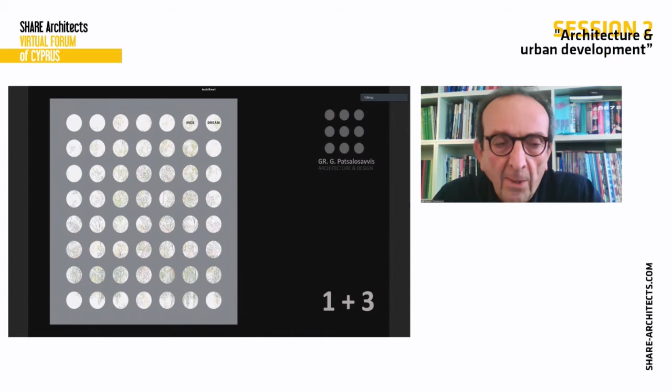I moved from London to Cyprus in 1996, and I've practiced since then in Nicosia. Today I would like to show a few things we work and design for the center of Nicosia, and our response to this newly formed urban environment.

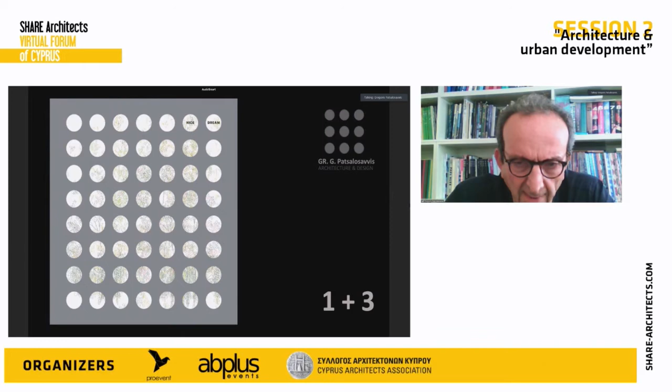The center of Nicosia, a few years ago, became a high density area. The planning law changed, and the current planning law allows for high-rise buildings and more density. The question is whether high-rise buildings are a necessity or a current trend, and how we respond to this.

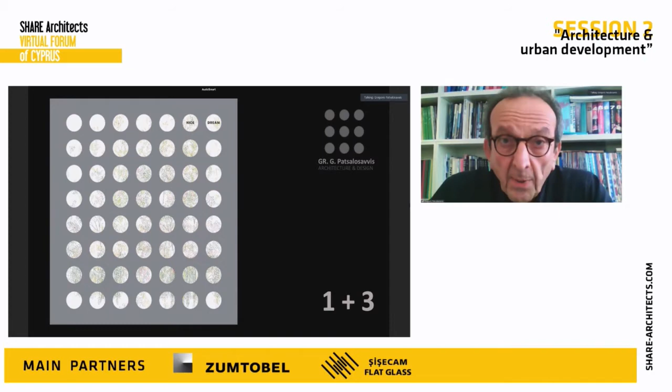Our response is that any high-rise building is built to create new city life, and make sure it will respond to the future development of the city. Our office is involved with residential projects, housing, multi-housing, commercial offices, hospitality, and public buildings.

May I quote something from Urban Future 21. It's been said that we live in the first urban century, where the majority of the world's population live in cities, and city dwellers will form part of a single global network.

This makes us think about what is our collective task for the development of the urban environment. We think we should aim for more sustainable cities. We're not talking about new cities, we're talking about transforming our cities into sustainable and livable cities.

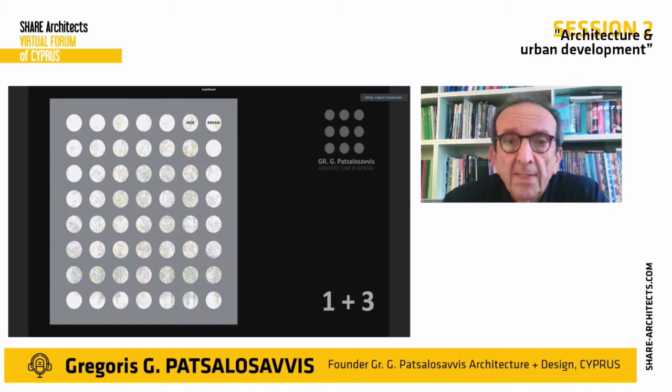The main principles of our office and design process are... sorry, I didn't change the slides before.

Going back to our main concerns in our design principles, since I started my own office, it has been environmental sustainability.

Our architectural design principles are based on response to the local environment, the quality of life, the improvement of quality of life, environmental issues, and the interaction of our architecture with the city.

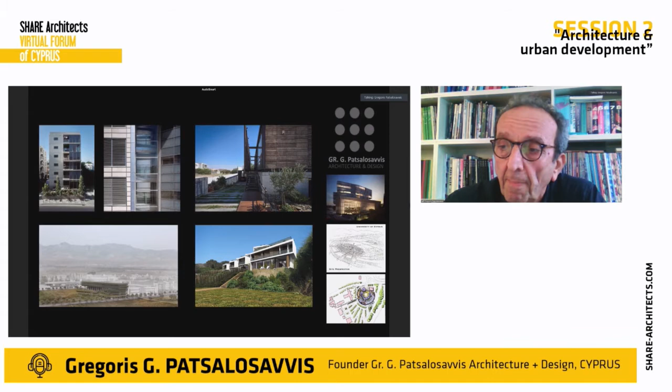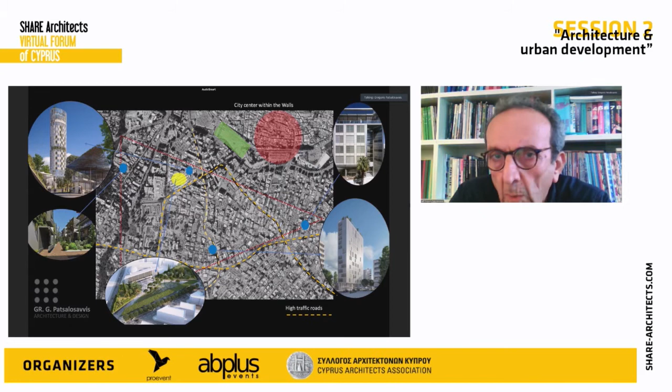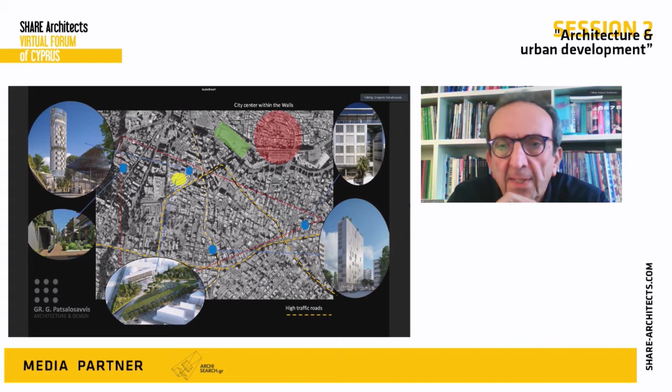The yellow spot is the new development of the old GSP Stadium of Nicosia. The blue dots are our office's interventions into this part of the city. In yellow, you can see the busiest roads going around this commercial dense area.

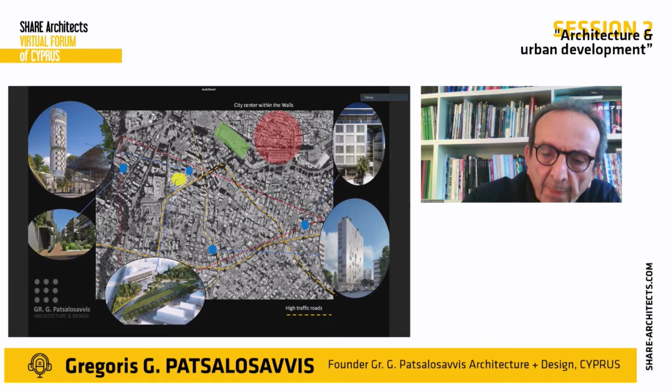The first project I will present is a joint venture with architects Yannis Kizis, Constantis Kizis, Efthymios Dougkas from Greece, and myself from Cyprus. It was a competition for the development of the old GSP Stadium, as we call it in Greek.

The program of the competition was a result of a referendum held by the municipality, where the people of Nicosia asked for a park and a square. So that was a challenge: to bridge these two public functions, a park and a square.

We all know the size of a football pitch and a stadium, and it is impossible to have a sizable park and a sizable central square.

Anyway, I think the competition was won by this project because our team managed to bridge these two demands of the people of Nicosia.

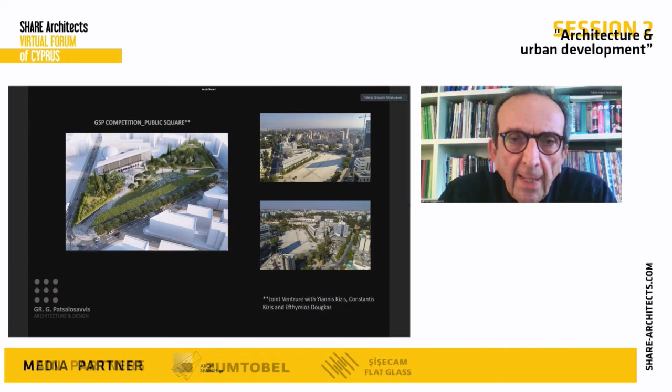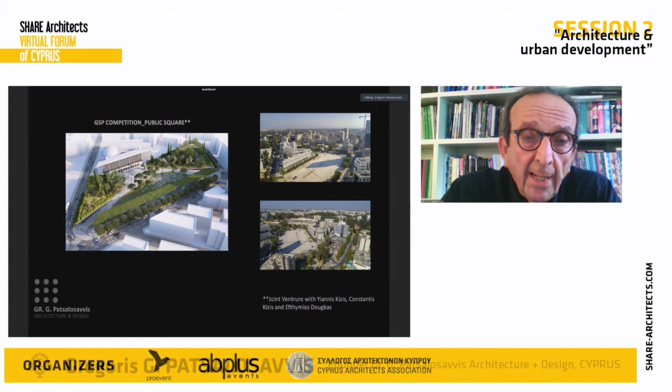It is the first public square in Nicosia, and it is already becoming a reference point in the development of the City in the Future project. It is on the way for construction, for the materialization of the project, and we expect it to finish in 2.5 years' time.

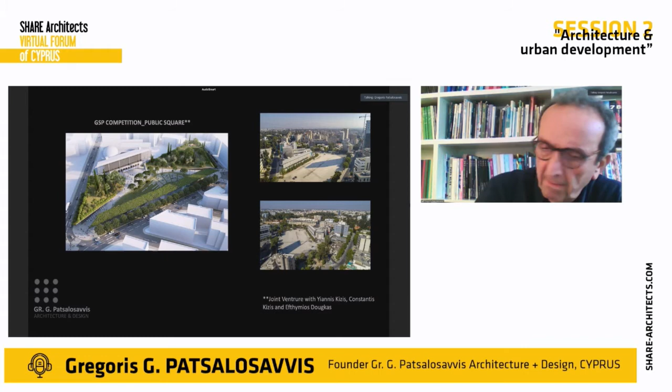The third project is the first building we built in this commercial area, the center of Nicosia. It's a building for one of the highly respected developers in Nicosia, Nice Day Development, started in 1996 and completed in 1999.

It's a building of shops and offices, and this was the first time we tried to face the issues of sustainability and environmental concerns. We introduced shading to all openings, controlling the sun and the natural light, filtering it while protecting from the intense summer heat.

It's been a long time since then, more than 20 years, and we always refer to this project because it was the first workshop for defining our design tools.

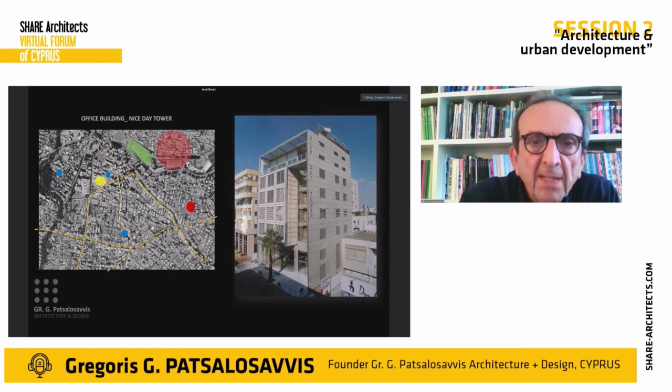The next project is near GSP. A few years after we won the competition for GSP, we were commissioned by a private client to design a mixed-use development building right at the northeast side, the east side corner of GSP.

This was a real challenge: how to respond to this new reality of GSP and create a landmark, while at the same time making a building that is sustainable and provides quality of life to its residents.

Initially, this was a mixed-use building with offices and residential units. At ground floor, receptions and common areas, 8 floors of offices, and then the top floors residential units, with common areas including a gym and cafe in the middle.

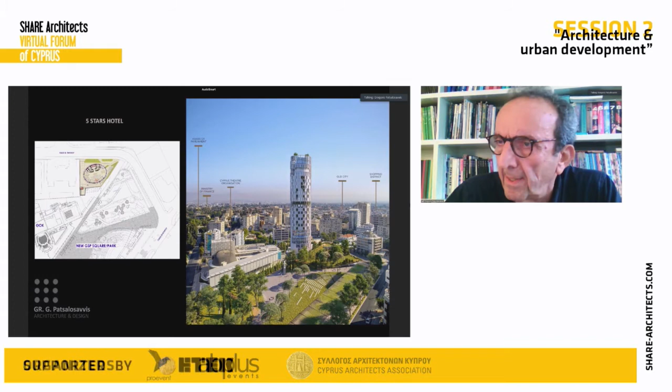Because of the economic crisis in 2013, the commission came in just before the big economic crisis in Cyprus, and everything slowed down until 2015.

In 2017, the client decided to change the program and make it a 5-star hotel, adding 8 more floors for a total of 28 floors. So it's a vertical hotel containing all the functions: receptions, conference areas, gym, restaurants, open-air swimming pools on top, and in the middle an administration area.

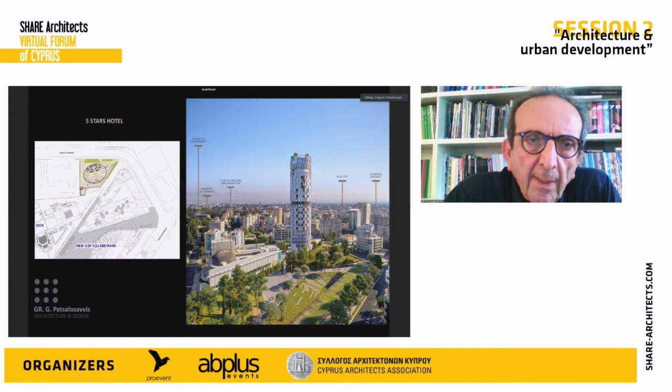The interesting thing about this building is that the shape derives from the site conditions. We wanted to respond to the competition brief, the new situation, and try to make the tower a landmark next to the first public square of Nicosia, oriented north-south.

All the habitable spaces have south orientation, with plenty of natural lighting, using and having the benefits of the sun when needed, and of course controlling the sun where we don't need it, filtering the lighting for the inside spaces. So the necessity of developing a system to do this environmental task forced us to design a double layer facade.

The external layer of the facade consists of a metal structure, metal panels, the majority perforated, and movable, made to move mechanically so they can control at each time of day the penetration of natural light and protection from the sun.

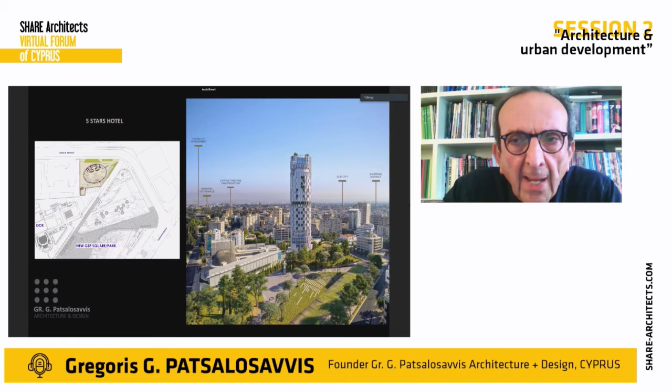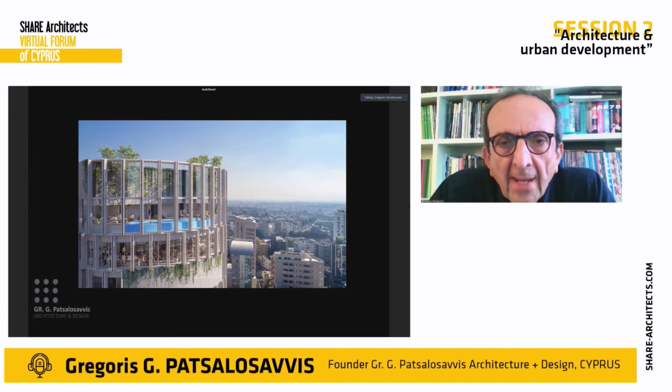We spent considerable time working out this system with local manufacturers, because importing these systems would be very expensive, and cost is crucial for a private investor. So we managed to develop a system, a folding system, which would serve our design goals.

The system is highly developed and competent at this stage, so we used it for our next project.

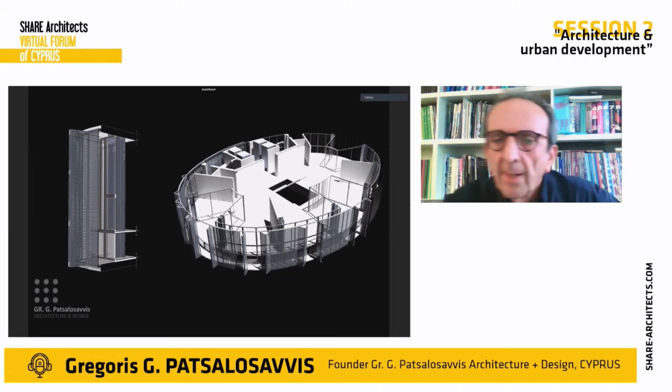Now the last project, the red dot on the map, is under construction now. It's again a mixed-use building by Nice Day Development, and it uses the same principles on the external skin, as we can see here.

Here we have the panel as a pivot panel. Some are fixed, some pivot according to the inside functions, to the functions of the spaces behind them.

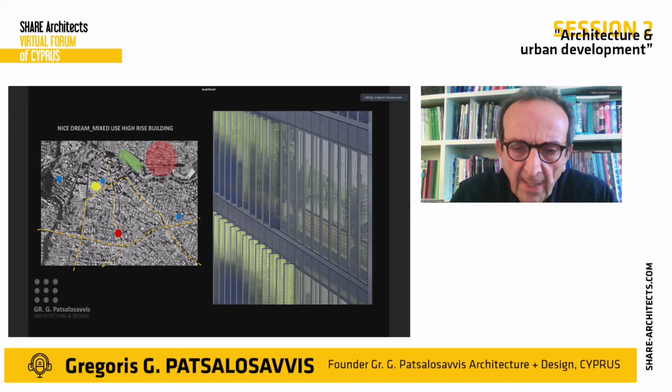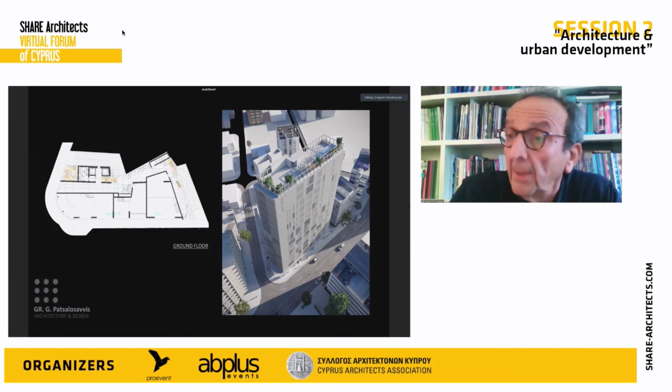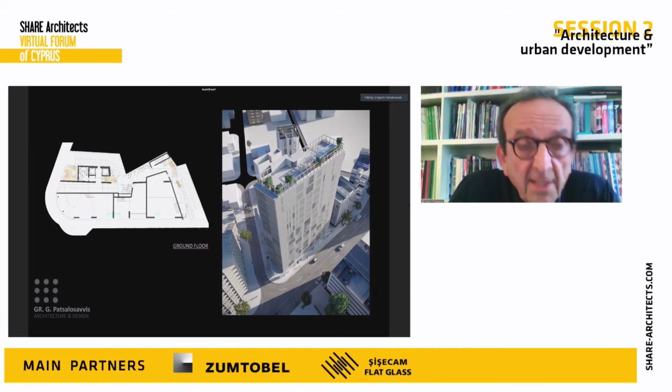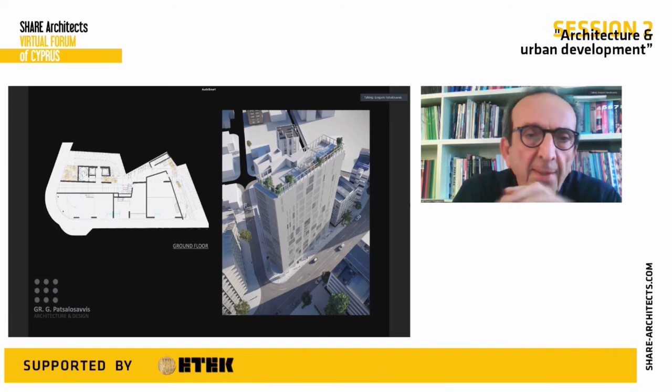The site was irregular and very difficult. It was very hard to locate a plan with the core inside the shell of the building.

It's a very narrow site, so we left the core of the building right at the outer skin. This is at the center, one of the busiest roads of Nicosia. It consists of shops at ground floor level, 6 floors of offices, an intermediate common space, and 6 floors of residential houses.

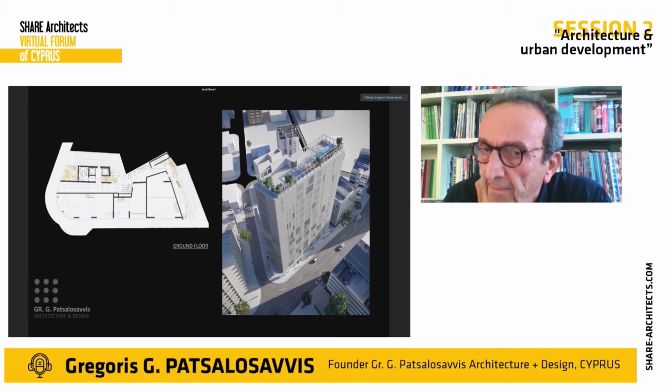This is the response to the urban fabric: a long, very slim and tall building, open on both sides, north, west, south, creating flexible spaces, a shallow plan where natural light can penetrate easily everywhere. With the sun shading system, people can control both the lighting and the protection of the interior.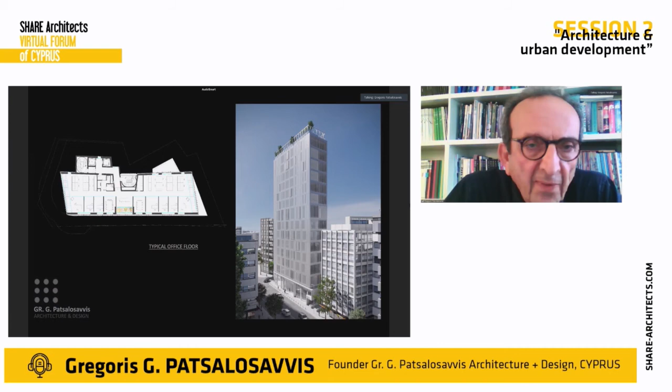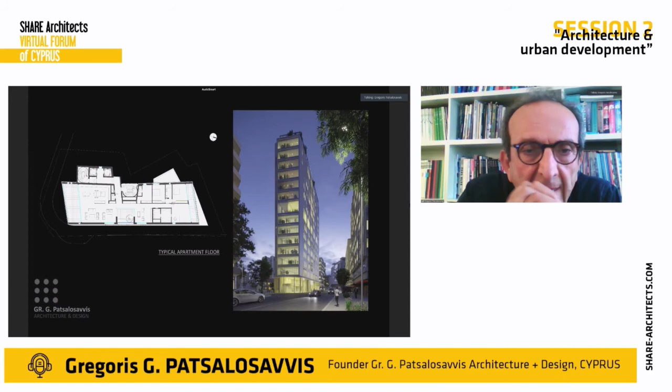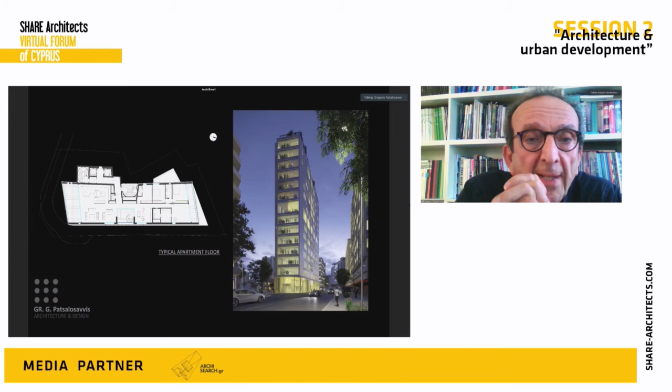The housing apartments are huge, very luxurious spaces, open north to south, with openings from east and west, and the penthouse has a swimming pool as well on the roof.

Now the shading system we use here, as I said, comes from the first project, the hotel. Here we elaborated a bit more, making it fold rather than pivot, achieving the result we wanted for the building.

During the day, the building has a uniform solid form, and slowly, when the sun goes away, it begins to show its interiors by opening up these folding panels, revealing the private and public spaces inside.

This is our presentation so far. I think we finished before our time. Okay, thank you very much.